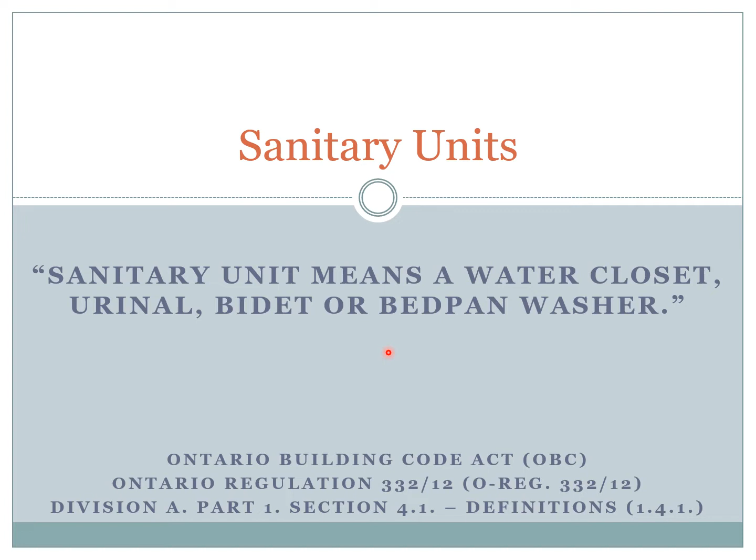This is your fifth in a series of PowerPoint presentations on sanitary units. For this one, we're going to be talking about urinals, plus we are going to do a wrap-up exercise with a fixture sizing table, where you can put all the sanitary units under one sizing table. Anyhow, sanitary unit means a water closet, urinal, bidet, or bedpan washer. It is in fact a plumbing fixture as defined by Division A, Part 1412, defined terms.

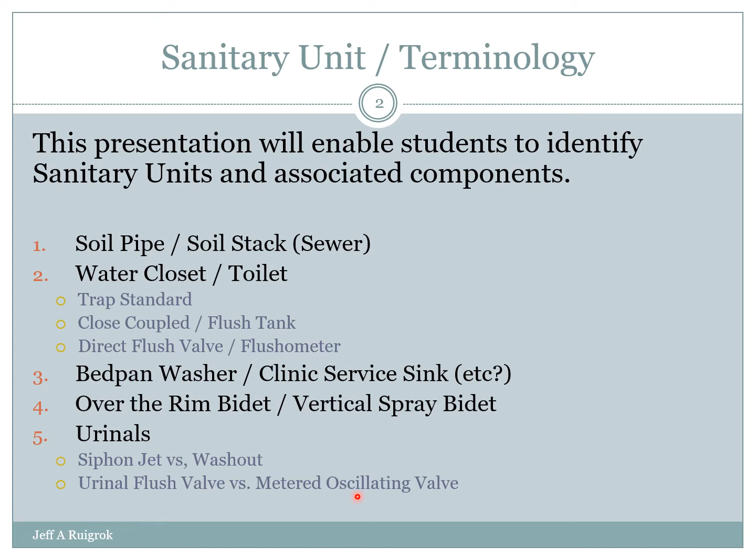We have already covered some terminology in presentation number 1. We have covered the water closets in presentation number 2, bedpan washers in presentation number 3, bidets in presentation number 4, and now we have the urinals. We're going to be talking about two specific kinds, the siphon jet and washout, heavy duty, light duty, and urinal flush valve, which is heavy duty, and metered oscillating valve, which is the light duty valving. So this is the fixture and this is the valves.

Anyways, I don't probably have to say a whole lot about urinals. They're just usually wall mounted, and a fella stands up against it, and there you go, aim for the fly. So light duty urinals, often called a wash down, washout urinal. In this case, Kohler calls it a wash down, but the building code calls it a washout. Again, just a wall hung urinal, has a fixture outlet pipe and a P-trap. And again, when you see a P-trap, it's usually a fairly light duty fixture.

So it has a fairly small metered oscillating valve, or what the building code refers to as a self-closing metering valve. So the common term would be metered between the industry and the code, but this is it here. You press on this lever, it's spring loaded, and the spring will return it to closed position eventually. You can adjust the tension on the spring to make the flush longer or shorter. And this valve mounts right on the top of the urinal.

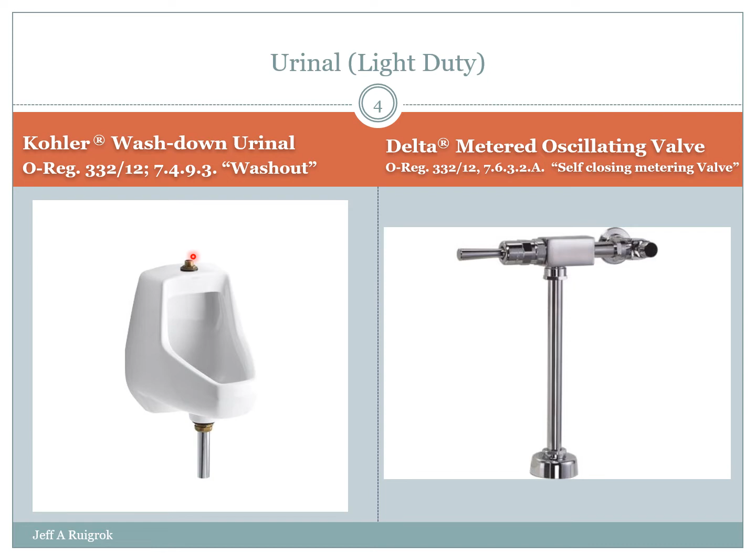We also have what I call heavy duty urinals. The one I'm looking at today is the wall hung siphon jet urinal. It is trap standard, which means that you have a trap built right into the urinal. It doesn't come all the way down, like an S trap might come right out. This one doesn't do that. What it does do is it turns and goes back into the wall. So it's called a 3/4 S trap, but it is trap standard, in my view. Controversial view, by the way.

For me, the reason I call it trap standard is because it has these bolt holes right here, and that counts for me as support for the fixture, which is part of the definition of a trap standard. Anyways, this is a heavy duty urinal. When you see the siphon jet, it even sounds heavier duty, right? Siphon jet. So it has a direct flush valve on it, which is much larger in size. In fact, this is essentially the same valve you put on a toilet.

It has a little bit smaller supply pipe, down one size, and then it reduces in size at the top of the urinal. The direct flush valves are essentially the same. Oftentimes this piece would be interchangeable. You just have to have the right supply valve. This is an angle stop, and the right tube. Anyway, so that's the heavy duty one.

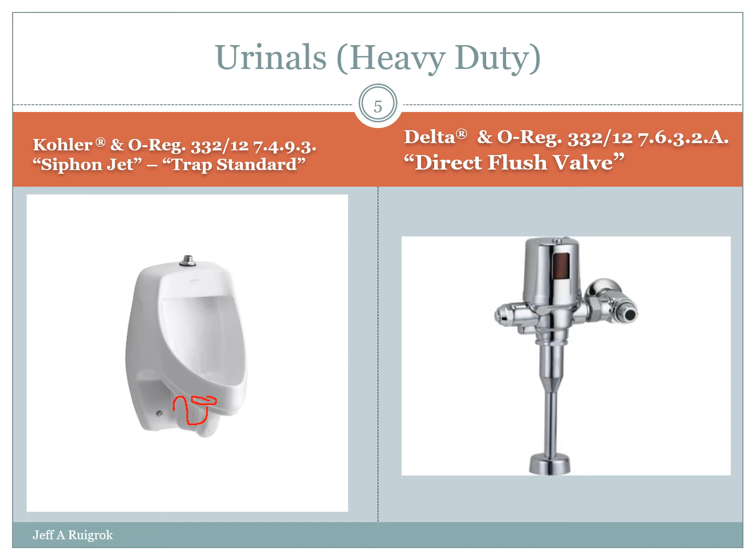Well, I kind of did this one already, but there's what I call the trap standard. And it's a 3/4 S because it turns into the wall. And there's the supports right there. There's actually a flange it mounts to in the wall, with the bolts going through there, and then this is the waste pipe here. Anyways, there's your definition again if you've forgotten for some reason. And the controversial part is support.

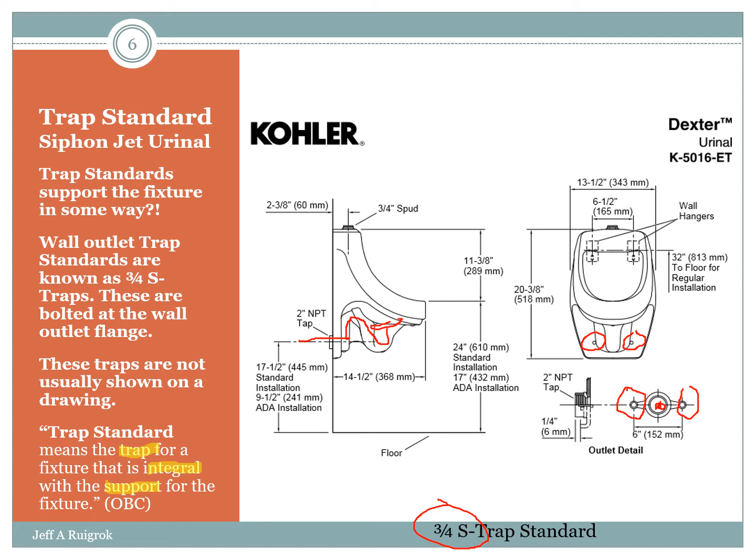The trap is definitely integral with the fixture. That's for sure. It's the support that's questionable. Anyways, for me it's a trap standard, heavy duty stuff.